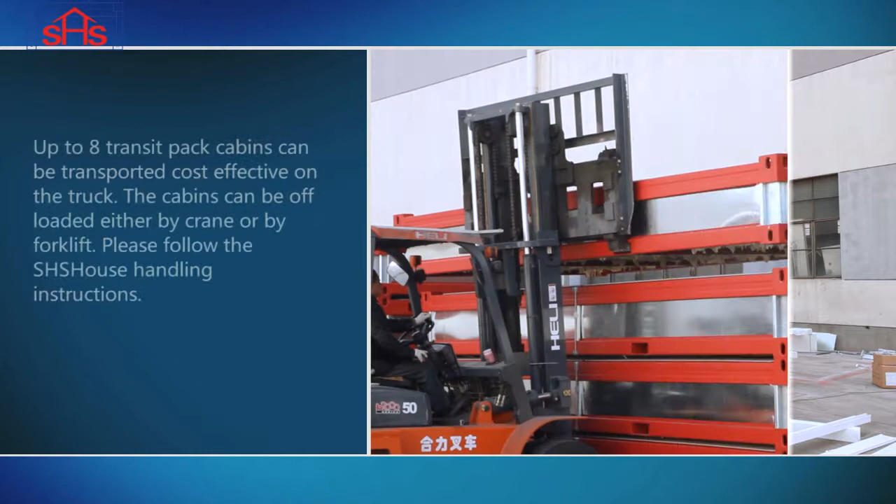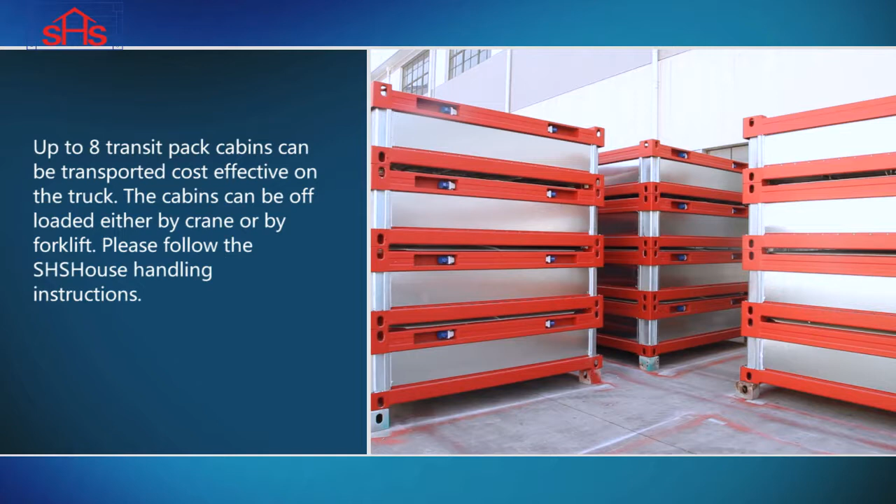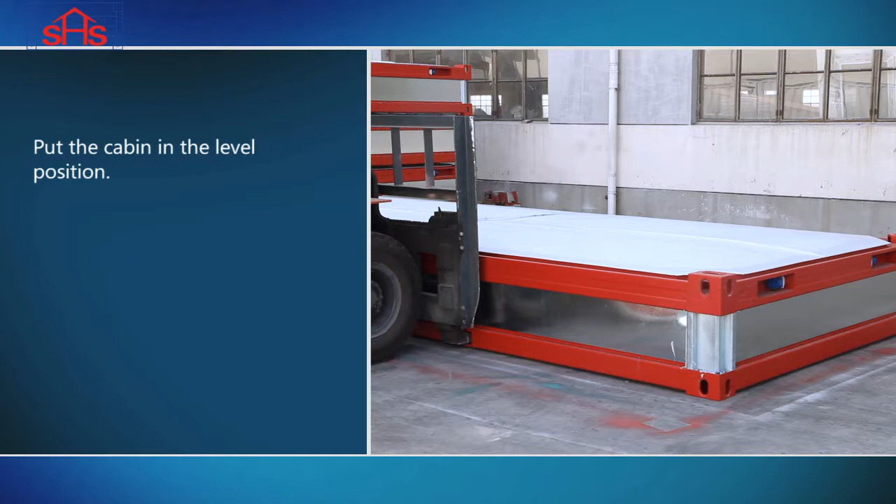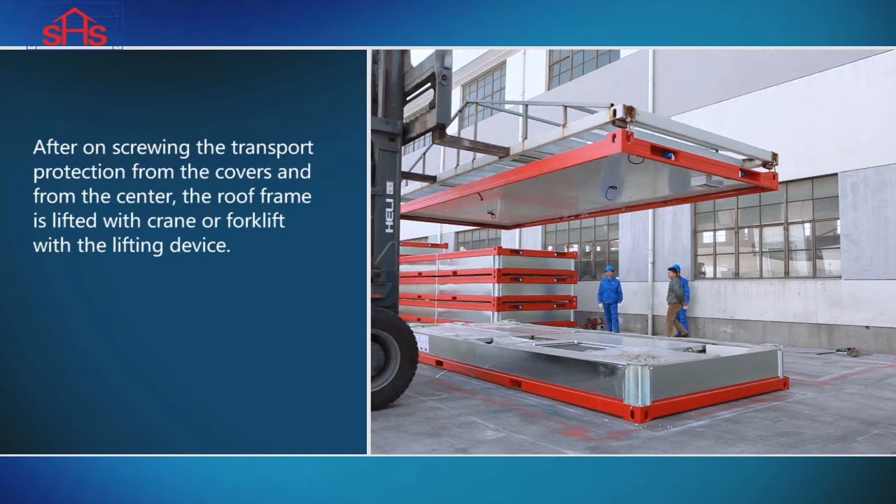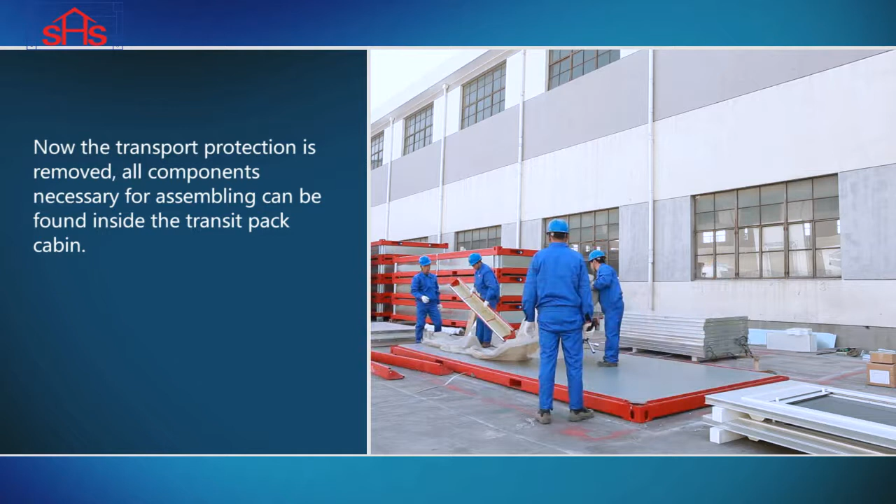Put the cabin in the level position. After unscrewing the transport protection from the covers and from the center, the roof frame is lifted with crane or forklift with a lifting device. Now the transport protection is removed. All components necessary for assembly can be found inside the transit pack cabin. All components are placed alongside the cabin.

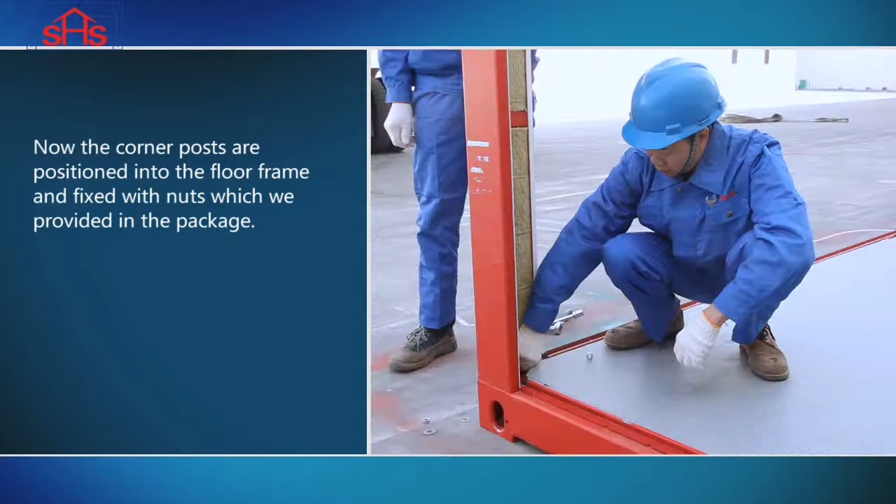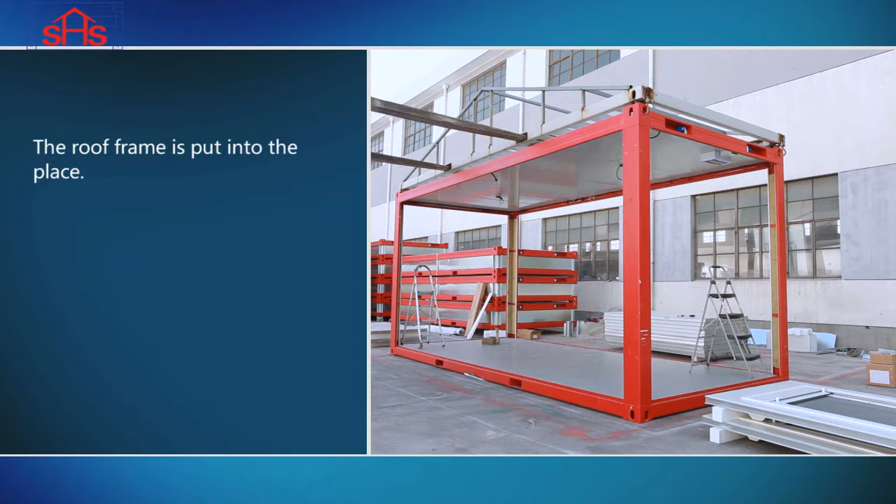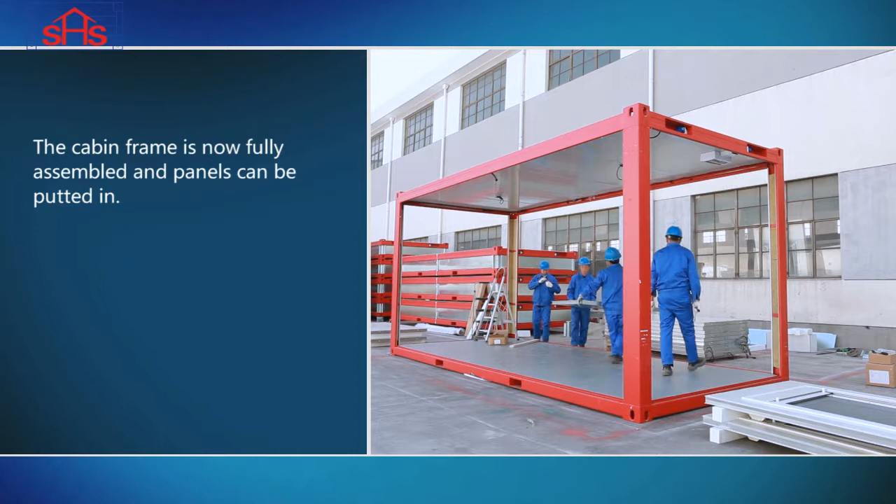Now the corner posts are positioned into the floor frame and fixed with nuts, which we provided in the package. The roof frame is put into place. The corner posts are firmly bolted to the roof frame in the same way. The cabin frame is now fully assembled and the panels can be put in. Door, window, sanitary window panels, as well as full panels can be positioned to your liking.

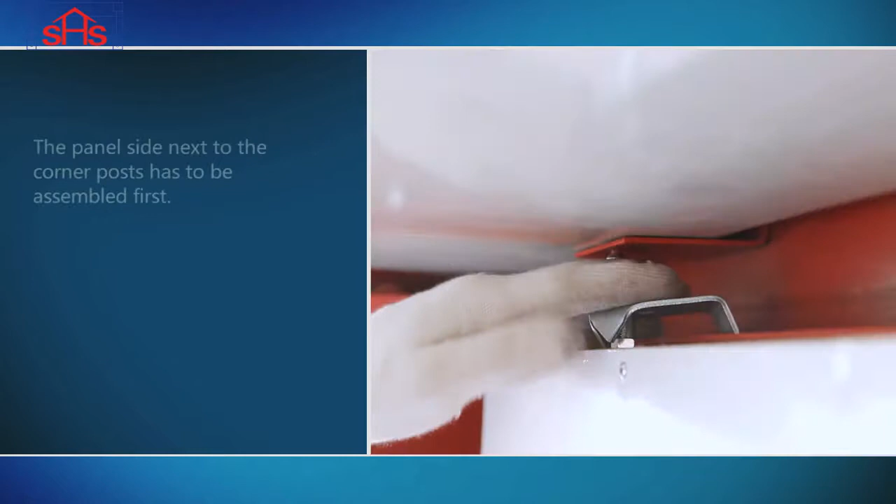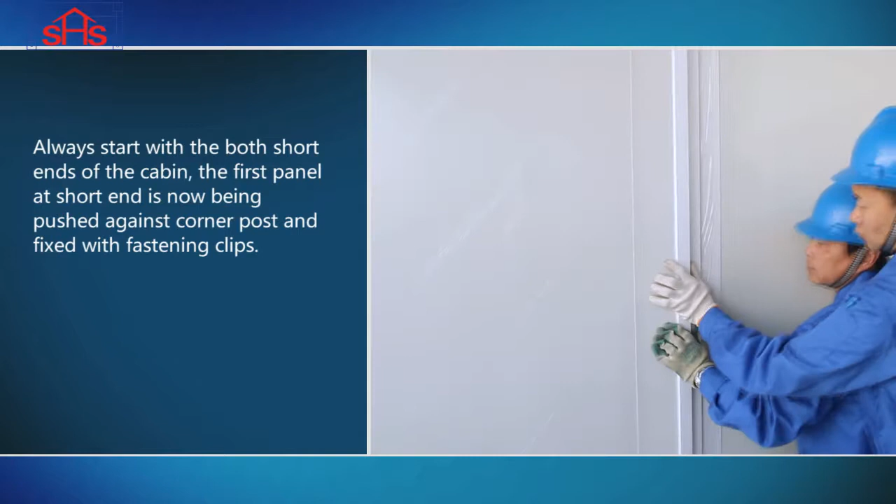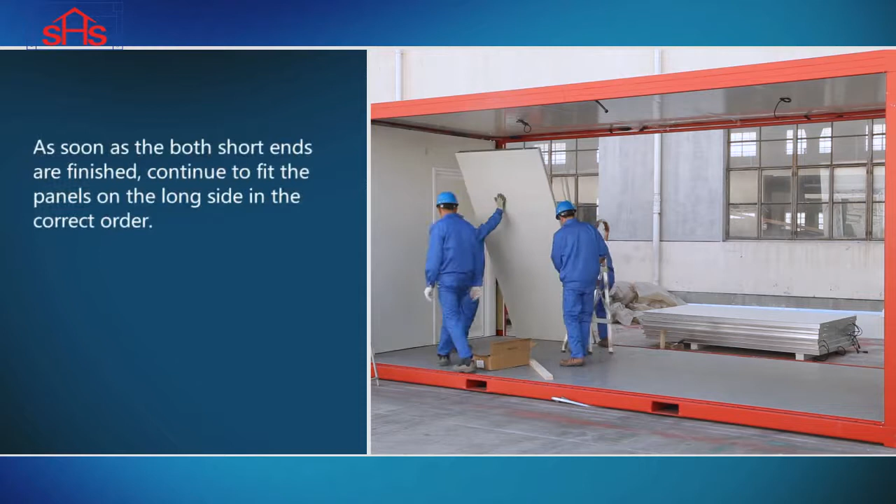The panel side next to the corner posts has to be assembled first. Always start with both short ends of the cabin. The first panel at the short end is now being pushed against the corner post and fixed with fastening clips. The second panel is put in and pushed against the first one. As soon as both short ends are finished, continue to fit the panels on the long side in the correct order.

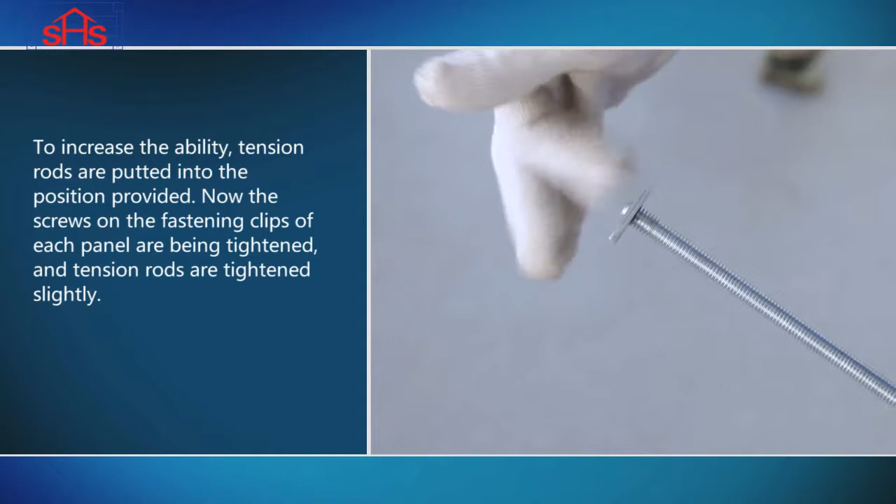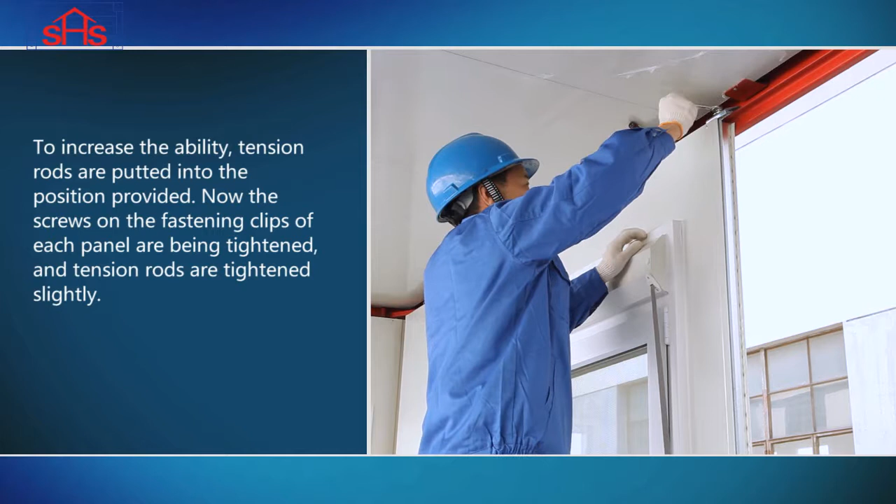To increase stability, tension rods are put into the position provided. Now the screws on the fastening clips of each panel are being tightened, and tension rods are tightened slightly. The electrical connection can now be established. To avoid mixing up cables, special plug-in connections are provided. All electrical installations meet the current international regulations.

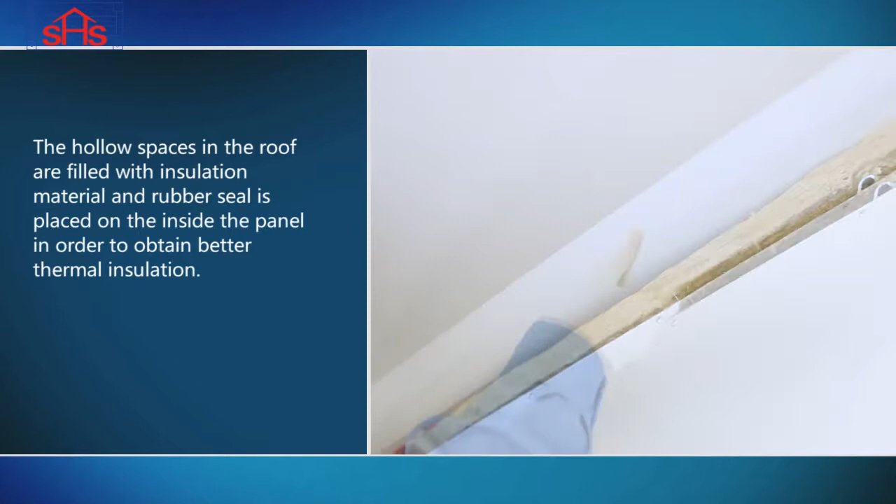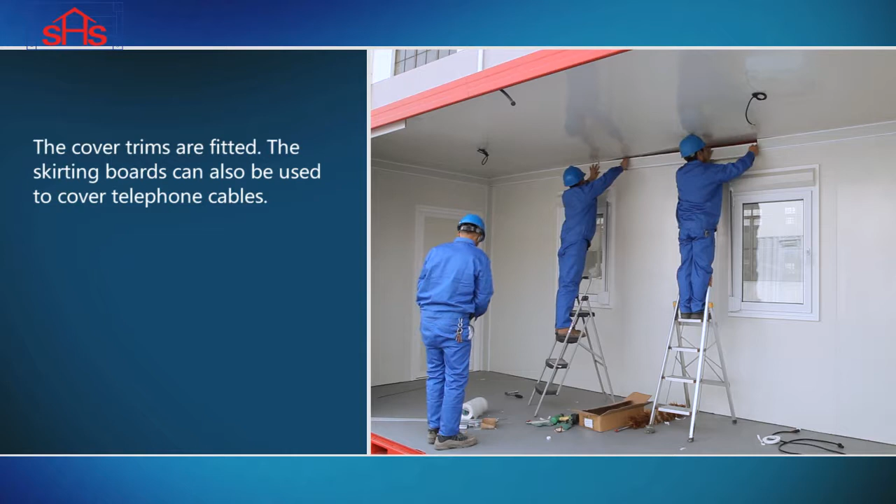The hollow spaces in the roof are filled with insulation material, and a rubber seal is placed on the inside of the panel in order to obtain better thermal insulation. The cover trims are fitted. The skirting boards can also be used to cover telephone cables. Your cabin is now ready for use.

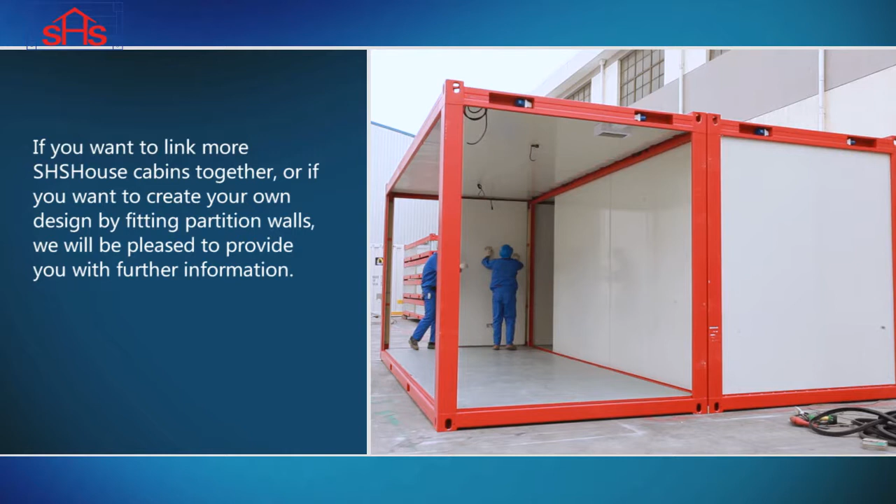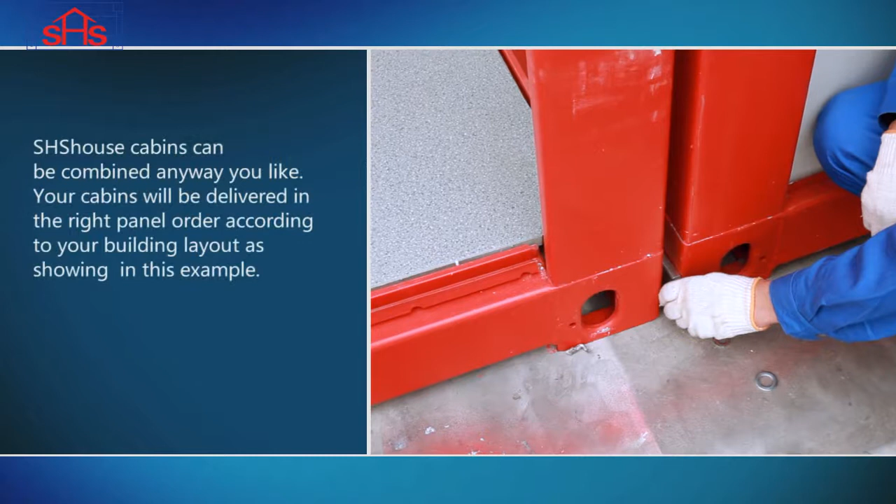Linking kit assembly. If you want to link more SHS House cabins together, or if you want to create your own design by fitting partition walls, we will be pleased to provide you with further information. SHS House cabins can be combined any way you like. Your cabins will be delivered in the right panel order according to your building layout, as shown in this example.

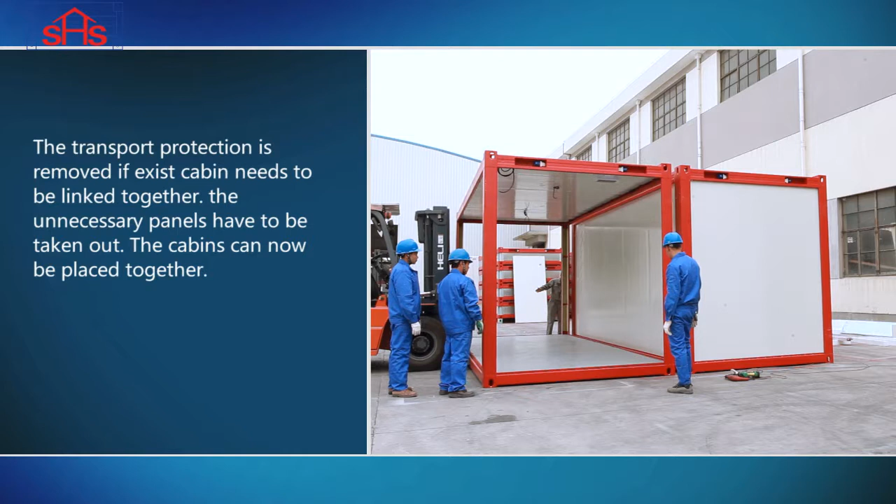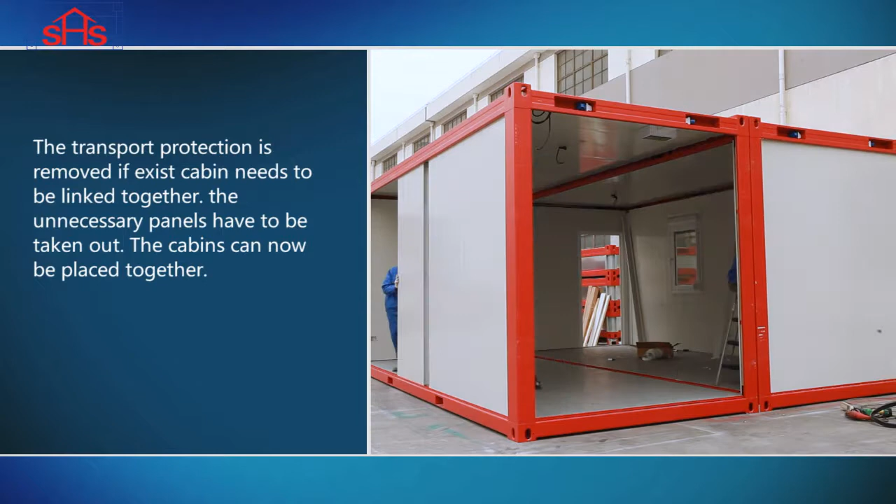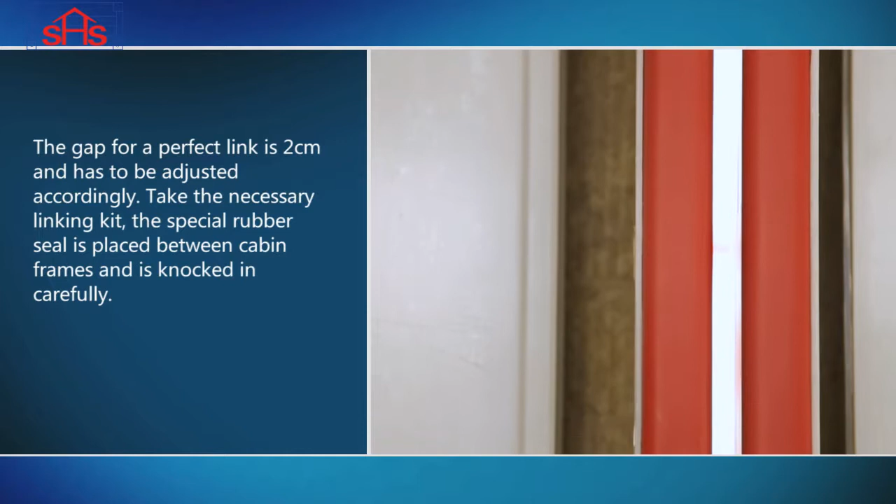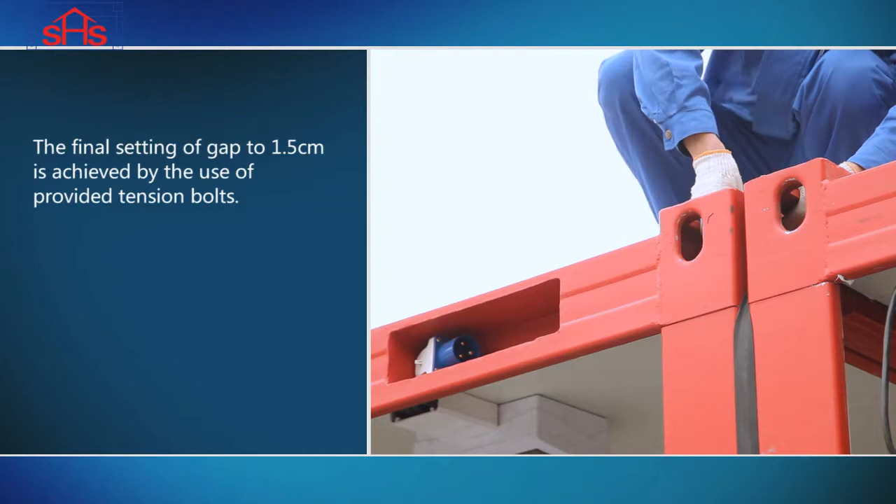The transport protection is removed if the existing cabins need to be linked together. The unnecessary panels have to be taken out. The cabins can now be placed together. The gap for the perfect link is 2 cm and has to be adjusted accordingly. Take the necessary linking kit. The special rubber seal is placed between cabin frames and is knocked in carefully. The final setting of the gap to 1.5 cm is achieved by the use of the provided tension bolts.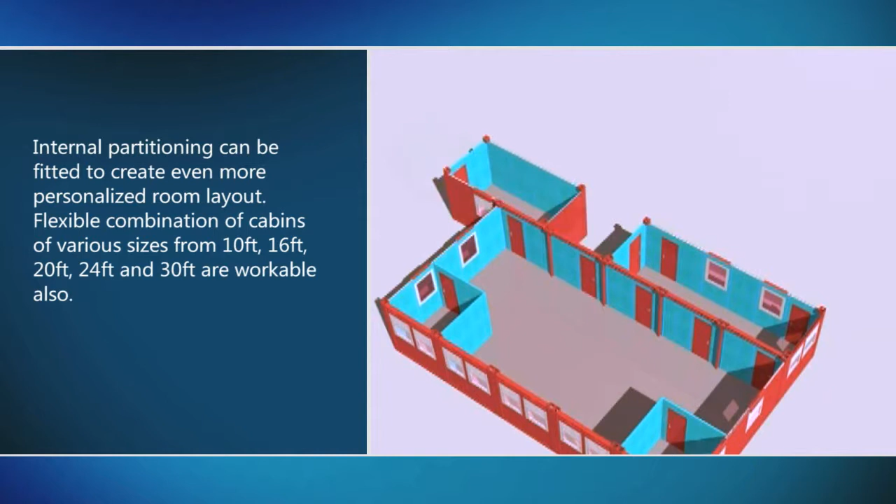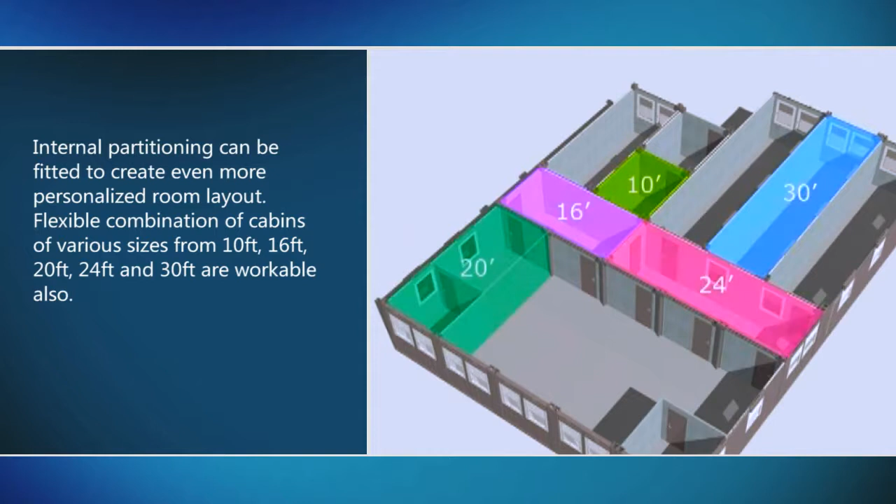Internal partitioning can be fitted to create an even more personalized room layout. Flexible combinations of cabins of various sizes, from 10 feet, 16 feet, 20 feet, 24 feet, and 30 feet, are workable also. In doing so, attention has to be paid to the correct order of the assembly.

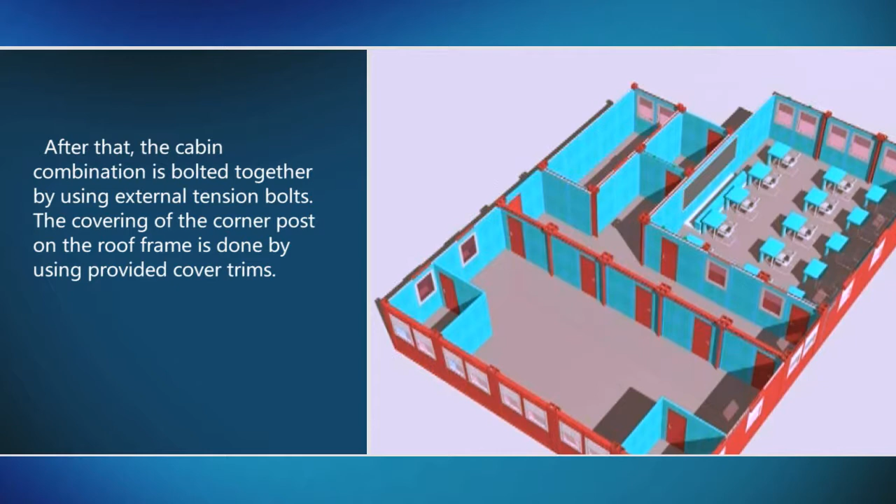The long and short sides are covered with special rubber seal placed in the center to the outside. After that, the cabin combination is bolted together by using external tension bolts. The covering of the corner post on the roof frame is done by using the provided cover trims. Your SHS House modular system is now ready for use.